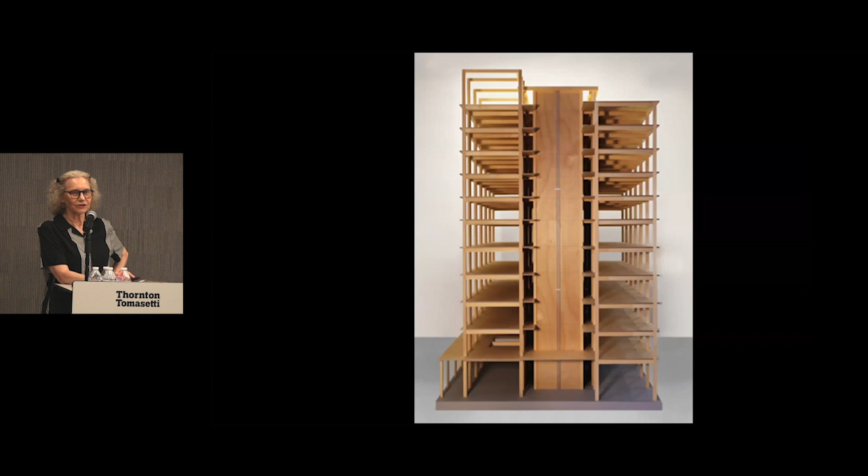The innovation that was encouraged by the $1.5 million grant by the Softwood Lumber Board for this particular tall wood building prize was to underwrite the testing of the projects that received awards, not to build those buildings. And so the role of government, or quasi-government agencies, in trying to jumpstart the mass timber industry is one of the issues we looked at. And these are views that were shown in those lectures, including the all-wood building, tall, nine stories, of Lever Architecture's Framework Project.

Let me talk a moment about Michael Green, because in his work with Eric Karsh as his engineer, they are people who from 2012 wrote a Creative Commons, or public domain, paper to do a state of the art of the knowledge of mass timber, and to advocate, as its title described, the case for tall wood buildings.

So height, even though it hasn't been achieved much over these last 10 or 12 years, and our title for tonight's talk is Height and Hybrids. So we are looking specifically at height and how do we go taller? How do we optimize the use in terms of vertical for tall buildings? But we'll also be looking at optimizing the material itself.

But that case for tall wood buildings, which Michael and Eric have pursued over these years, takes the idea of multi-stories as an aspect of urban density and climate crisis solutions by building urban density. And that's one of the things we'll also talk about tonight.

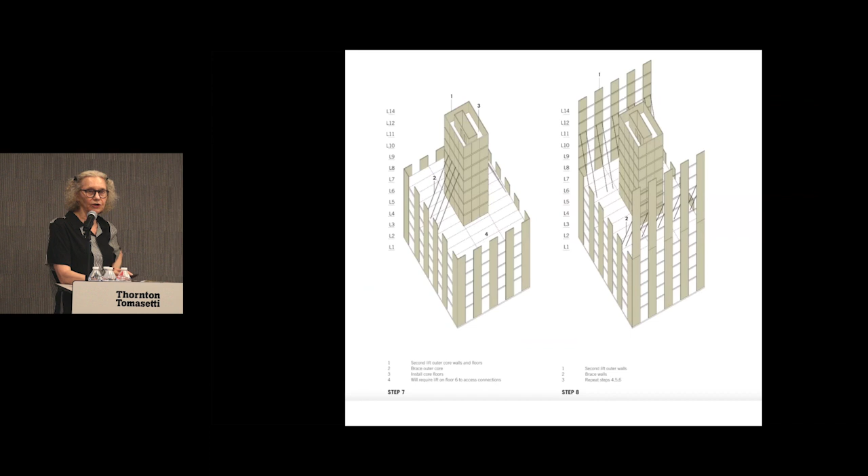So this project that Eric will mention, kind of the Empire State Building in wood, was a get-attention sort of effort, and it was covered by someone in this audience at the moment, and did indeed raise a lot of eyebrows. There were other projects that Eric will talk about that advocated for multi-stories.

Another one of our pair of speakers in the lecture series spoke specifically about the embodied energy as being what we call the now narrative, and the upfront carbon, the carbon cost of building that exists in the materials on the day that the building opens. And this is an enormously important issue, and one that our speakers all will be talking about tonight.

So Eleanor Gansky and David Lewis gave an absolutely spectacular lecture that I encourage you to watch on video, where they talked about life cycle analysis, managed forests, and many other issues, and alternative biogenic materials that are part of the kind of predicate that's necessary in order to be the foundations of talking about taking mass timber to scale as a mass-produced and industrialized product. That we'll be talking about tonight. And so in the lecture, in the exhibition, you see issues about embodied energy.

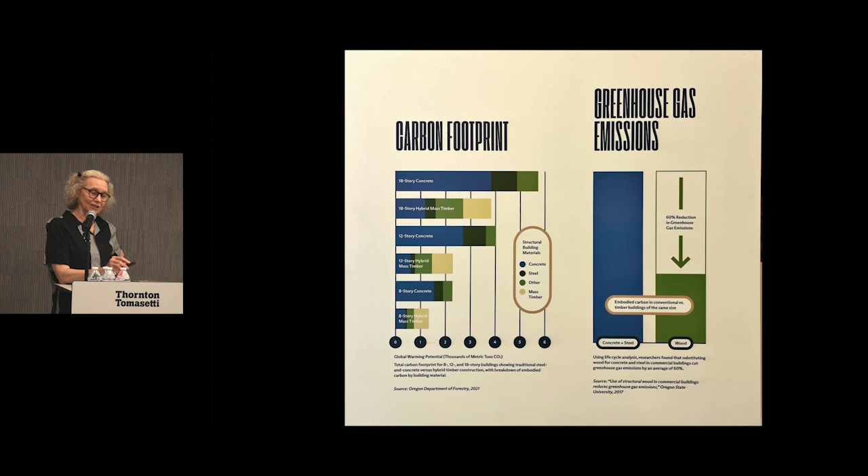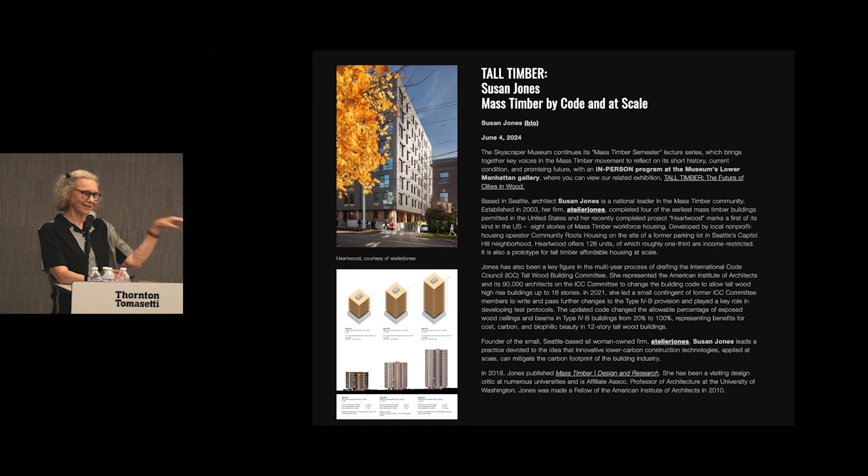We also had Andrew Waugh, who gave us a background in his earliest work from about 2008 or 9 in Europe, in the UK, a London-based multi-story building. And we also had Susan Jones, also from the West Coast in Seattle, who, again, in a wonderful lecture that I encourage you to listen to on our website, talked about her participation in code writing in the ICC code that raised, as you can see in the bottom slide, the approved height by code to 12 stories, and then the dream now is 18 stories, and we're going to be talking about height, especially.

Alejandro Fernandez from the Chicago office of Thornton Tomasetti will be our third speaker. And then in between, we have Benton Johnson from SOM, also from the Chicago office. And I acknowledge our carbon footprint for transportation for this evening is fairly egregious, but the important point is that we're all gathered here together to spread the message and to understand and to meet each other and kind of reinforce the bonds of community of the mass timber movement.

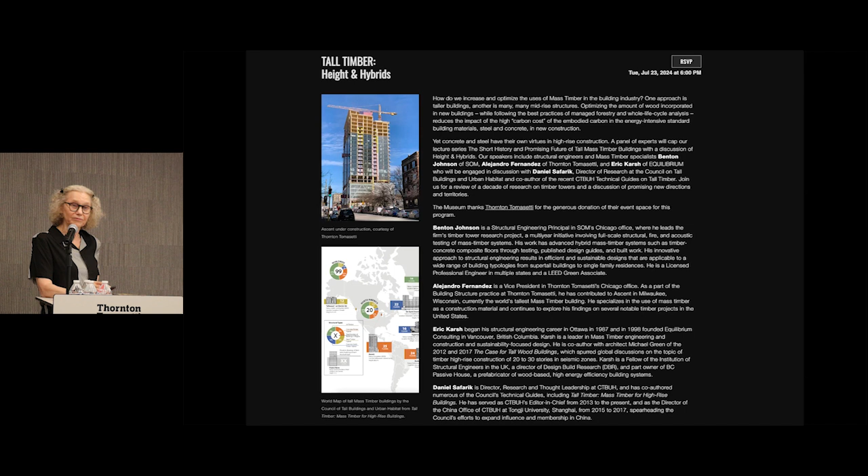So I'm going to hand this over to Eric. I think, with the longer introduction that we do, I forgot to mention Daniel Safarik, who is here also from Chicago, from the Council on Tall Buildings and Urban Habitat, where Daniel has been the editor on a series of publications like this one right here. The first of their two technical manuals called Tall Timber: Mass Timber for High-Rise Buildings.

And Daniel has been very involved throughout these past about 5 years in the CTBUH's initiative to run conferences and publish papers, and then these technical manuals. They were behind the exhibition that was actually started in Chicago at the Chicago Architecture Center called Reframed, which was the foundation for the exhibition which is now at the Skyscraper Museum. So Daniel is going to do a presentation that summarizes kind of what has happened since about 2020, when the CTBUH began to pay special attention to mass timber, and then moderate the Q&A that we have after.

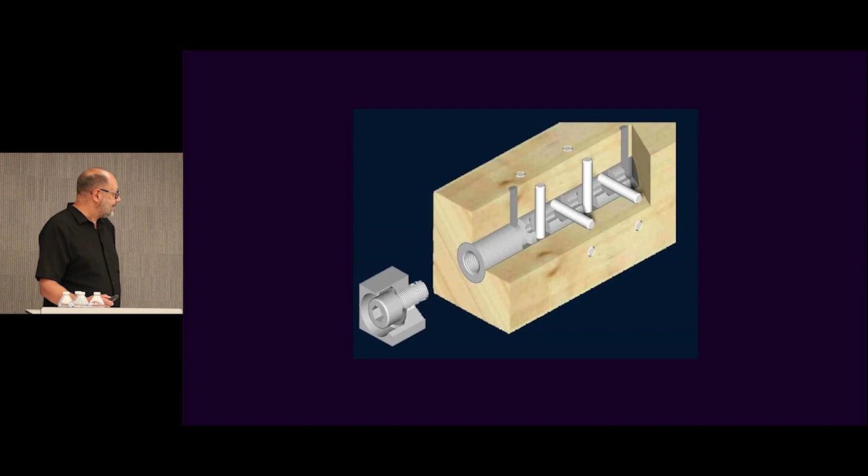The accuracy that these machines brought to the timber fabrication process allowed us to rethink the way we design wood. It allowed us to develop all kinds of really high performance connection systems that required accuracy without the labor intensive requirements that come with doing it by hand. And for us anyway, it completely changed the way we looked at timber design.

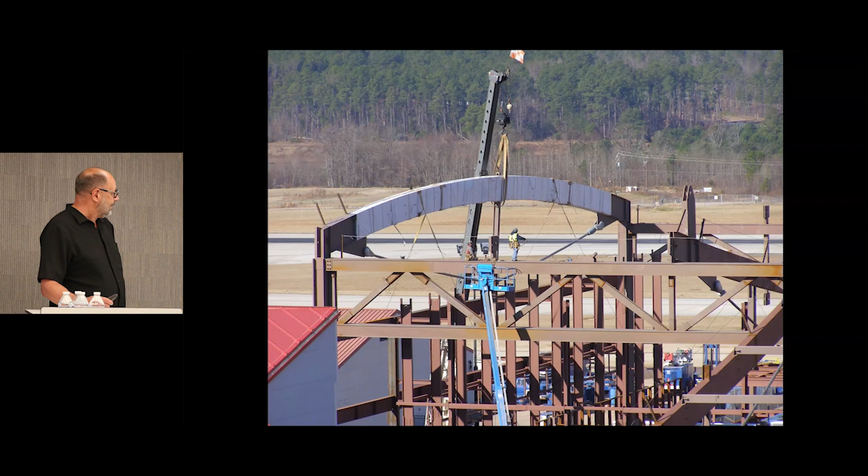And a good example of that is the first US project actually that we did. We were hired as specialty engineers to re-engineer the roof of the Raleigh-Durham Airport, which we did with a German connection system. That redesign allowed us to save about $1.5 million on a $7 million contract and bring the project on budget.

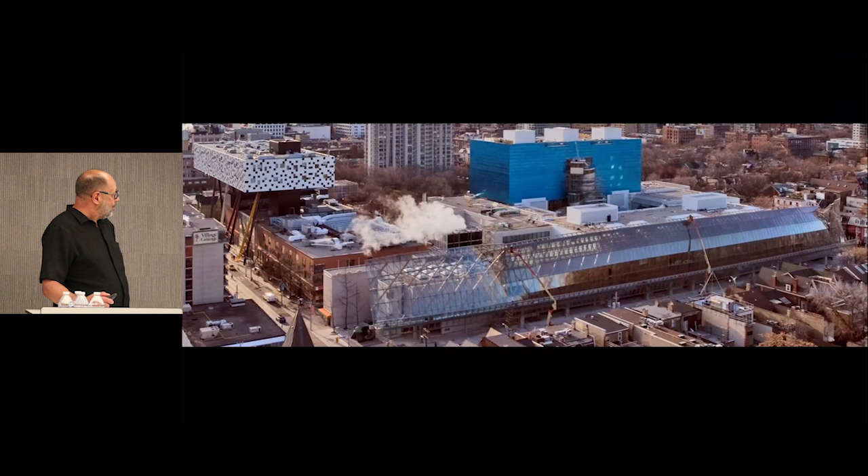You see here a view of the Galleria Italia from the interior. And I love showing this picture because this is a museum of art, and yet people are sitting down to look at the structure, which is very gratifying for a structure.

But the big change that probably impacted the discussion that we're having today was the advent of mass timber. So the idea that we could manufacture very large wood panels, and when we talk about mass timber, we're not just talking about CLT, we're talking about any engineered wood product that is made in panel form. And the idea of mass timber is the construction system, putting buildings together using large panel products.

All that technology kind of gelled and came together in one pivotal project for us, the Earth Sciences at the University of British Columbia in Vancouver, which was a demonstration project funded by the BC government. We could not get CLT in the province yet. So we decided to build the floors out of LSL panels, but because they're limited to 3.5 inches in depth, we had to make them concrete composite. So this is one of the test panels at UBC with 4 inches of concrete and acoustic separation and a 3.5 inch LSL panel, which allowed us to leave the structure exposed.

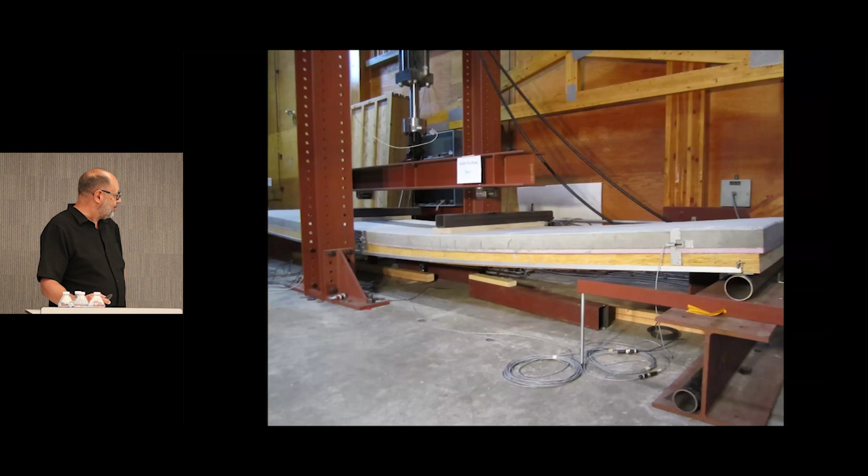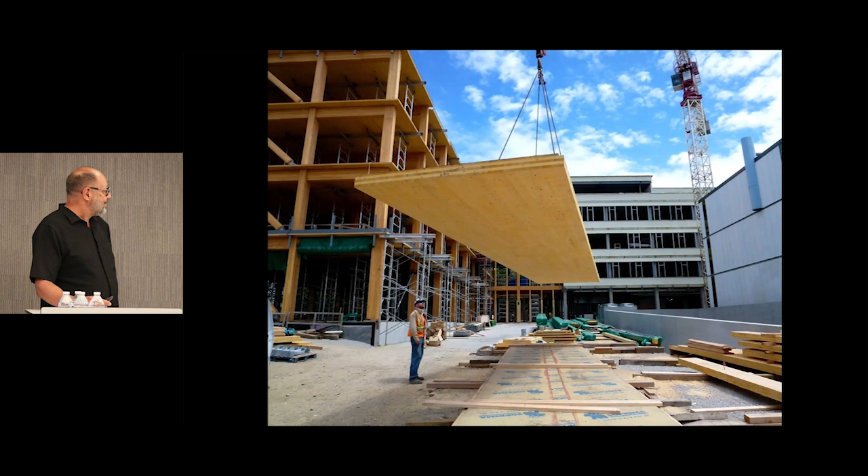But by the time we got to the roof, Structurelam started producing its first CLT panels, and we were really crossing our fingers that that would happen. So we were able to build a roof and the canopy that wraps around most of the buildings in CLT.

I have to say, standing at the top of it, I thought nobody's going to want to use this thing. I found it a little bit scary and thought anybody who realizes that this is a wood stair isn't going to want to use it. That was not the case. It turns out the average building user doesn't question the engineer's work, which was good news.

So it is in that context that when Michael proposed that we get a small grant to write this case for tall wood, that we approached the challenge of building tall wood buildings, with all that technology and innovation, 15 years of innovation that we had gone through. And I told Michael, we can do this. But it started as a 12-story building. And if you watch Michael's talk, he mentioned that.

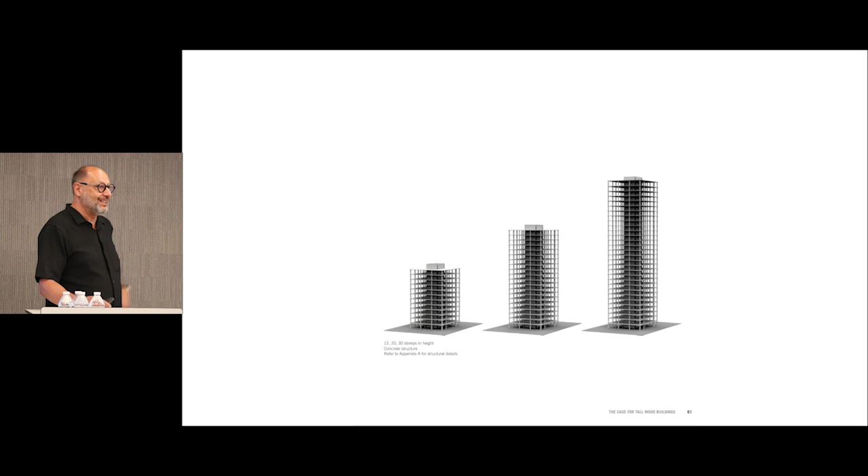I walked around Vancouver and counted balconies for months trying to wrap my head around the idea that we were going to do a 30-story building, a timber building at some point. But from the architect's perspective, it was a piece of cake.

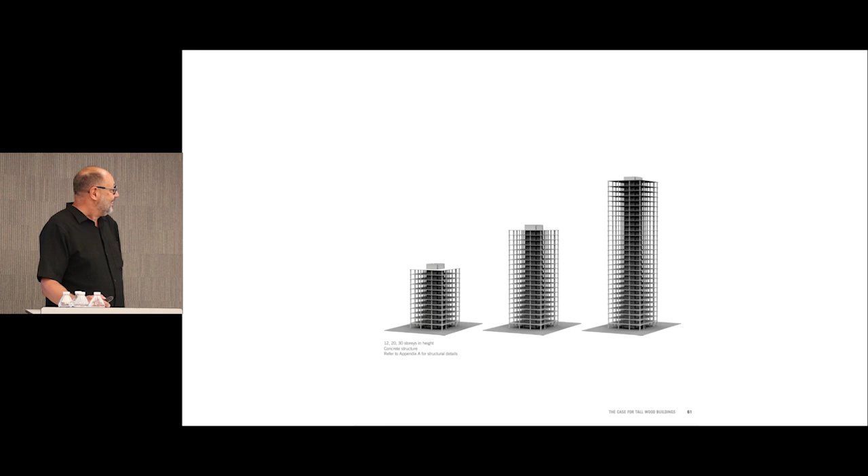In any case, we developed a system, and we were committed to not just doing the gravity system in wood. We wanted to do the lateral system mostly out of wood. So we developed this, what I would call a CLT shear wall and steel link beams, ductile link beam system, because we're in a high seismic zone, for up to 12 stories. And then we developed an exoskeleton equivalent for the higher buildings. And it worked really well.

The system has never been used in a real building, as far as I know, but it was tested at UBC and peer reviewed and could be used. But this was the engineer's solution behind the idea of doing a 30-story timber building at the time.

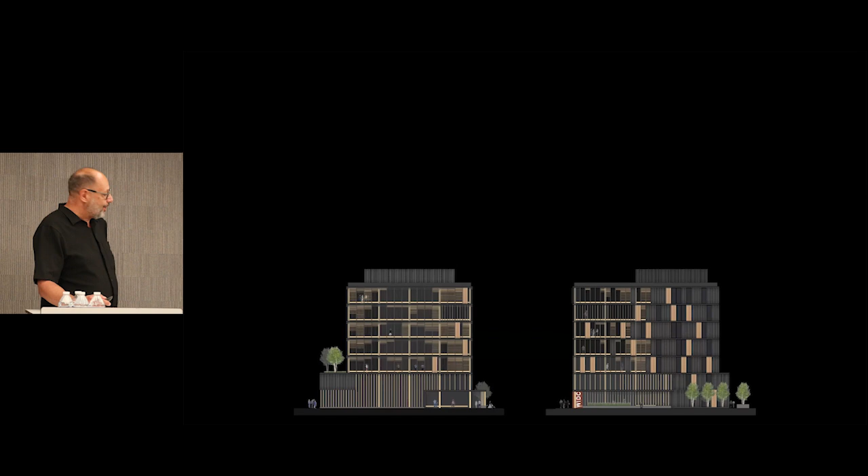This inspired the province of British Columbia to fund a demonstration project called the Wood Innovation Design Center, located in a small town in northern BC called Prince George. Not a very tall building, but it was the tallest modern all-wood building at the time in 2012, at about 100 feet. And this is a 3D image that MGA developed to explain the integration of services.

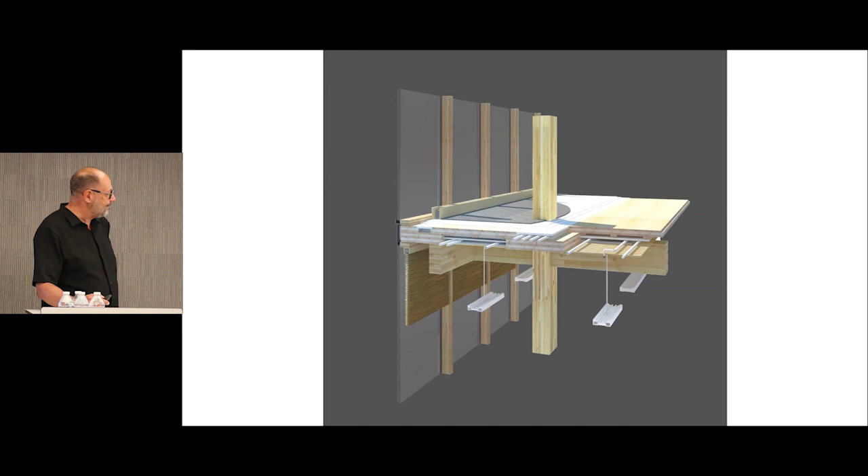Because it was a demonstration building, we wanted to show as much of the structure as possible. So we were looking for clever ways to hide services in a corrugated CLT floor plate, which you see here. And this timber can be built through the winter. And this was the first project in North America to have an all CLT core. Not the highest seismic zone in BC, but still a seismically active zone. And we managed to do the entire building, including the lateral system, out of CLT.

There's a view of the lobby, and you see here the underside of this corrugated floor with accessible panels to access services, and then the exterior of the building, which you also saw in Michael's presentation.

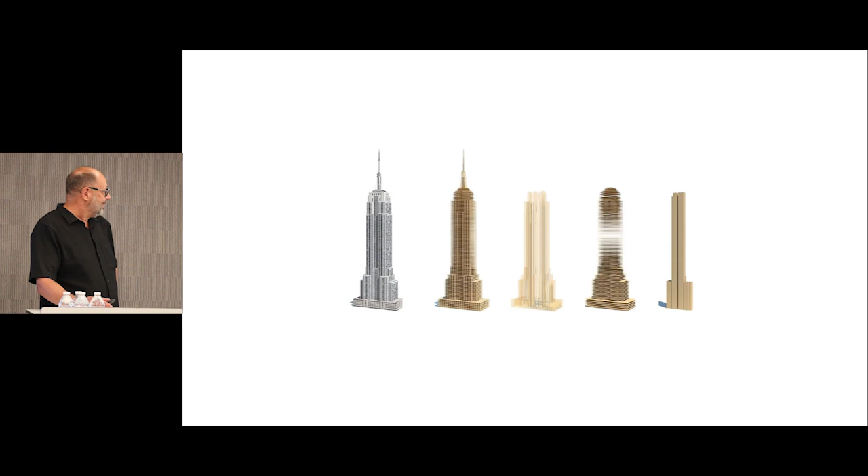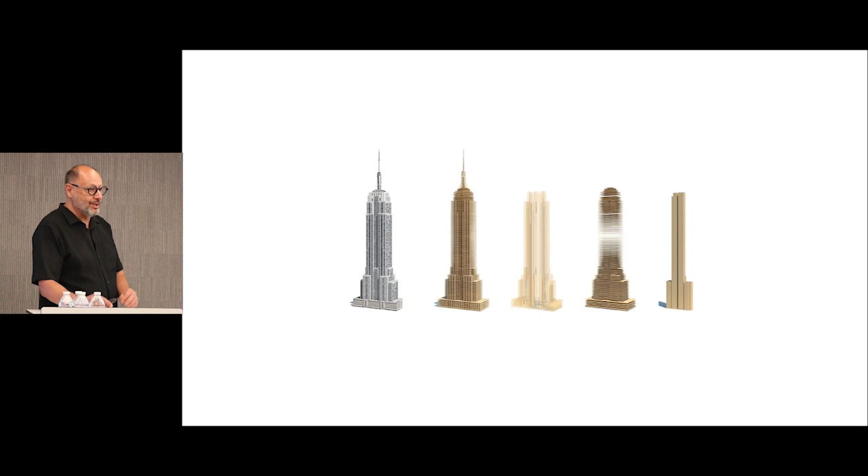But then this brought us to a marketing exercise for a company in Finland called Metsä Wood. They make Kerto Q LVL. They wanted us to redesign the Empire State Building out of wood, or find a way to show that it was possible. So we came up with the idea of using shear walls on either side of the 72 elevator banks. So that gave us a 220-foot long shear wall at the base. And then in the opposite direction, we basically went the way that the real building is built, using moment frames.

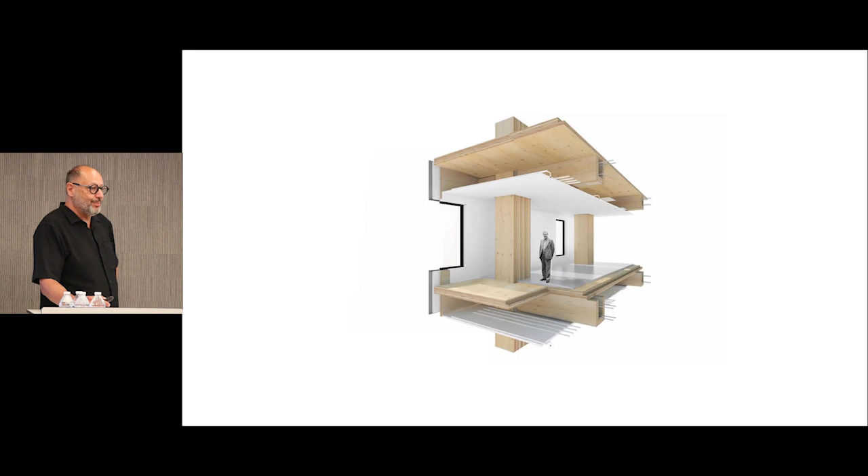And moment frames in timber are difficult to do. And there's always the issue of creep and shrinkage in wood. So we had the idea of using a system that was first used in New Zealand, using post-tensioning cables inside of hollow caissons. And we would have had in real life to figure out clever ways to deal with that shrinkage at the column lines, but we did a very simple model and concluded that it was absolutely possible with 5-foot by 6-foot LVL columns at the base. So here's our marketing image, which you've seen probably a few times by now.

Another tall wood project with Shigeru Ban in Vancouver. This is called Terrace House. It is right next to the Evergreen building by Arthur Erickson. And Shigeru Ban's idea was to have a concrete structure that matched the concrete structure that is adjacent to it, and then do the rest in timber. Unfortunately, the developer ran out of money, sold the project, and my understanding is that this project right now is going to be built entirely out of concrete. But it got through permitting, and the city of Vancouver approved an 8-story on top of 11-story concrete building.

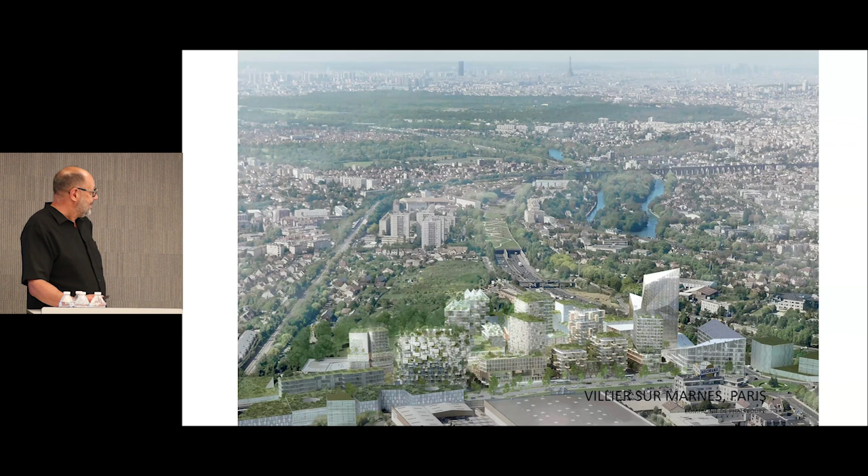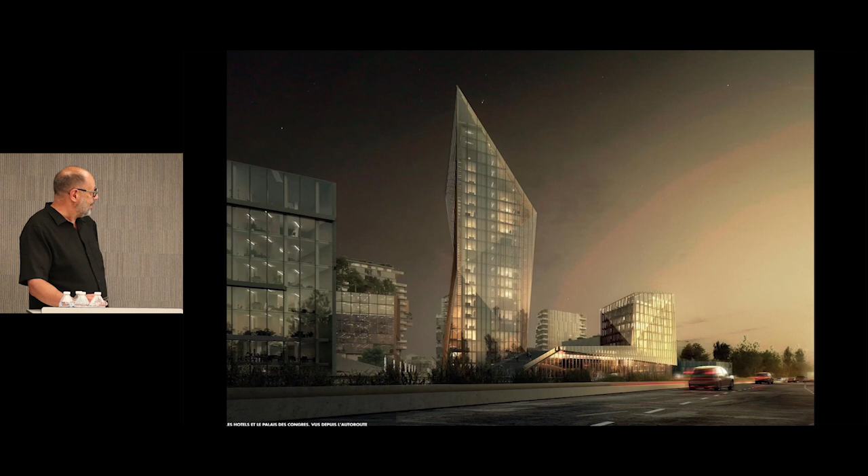We were invited in 2018 for a competition in Paris. This is the project. It's 1.5 million square feet. We won the competition. There are 6 architects on the project, including Michael Green, who's got the two tallest towers in the middle, and one on the right-hand side by Kengo Kuma, who we helped with engineering. The project has yet to go ahead, but like I said, we won the competition, so we're hoping to go ahead with this project at some point. This is a 26-story tower, which is going to be a concrete core and timber gravity system.

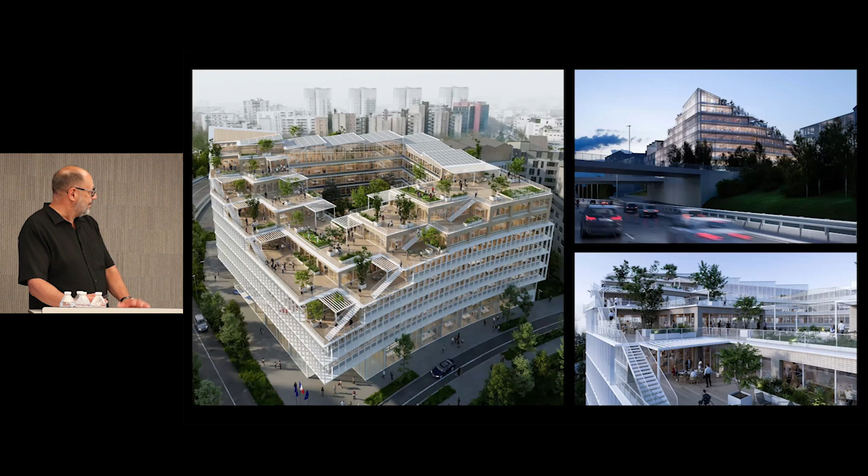So this competition brought us to bid on other projects in France. This one we won the year after and actually got to build it. It's a school board office building. It's 9 stories in total, including about 1.5 stories of concrete. And what is interesting about this is that it is a glulam post and beam, but for cost reasons, we use a very, very thin precast plank for the deck. It's 50 millimeters thick, so 2 inches. And we have a concrete topping for acoustics on top of that. And that project was just topped out about 3 months ago.

We kept doing projects in France, so we now have an office of 4 full-time engineers in our Paris office, and are doing other projects. This one is a 350,000 square foot office building, which is currently in construction. This one is in Madison, Wisconsin.

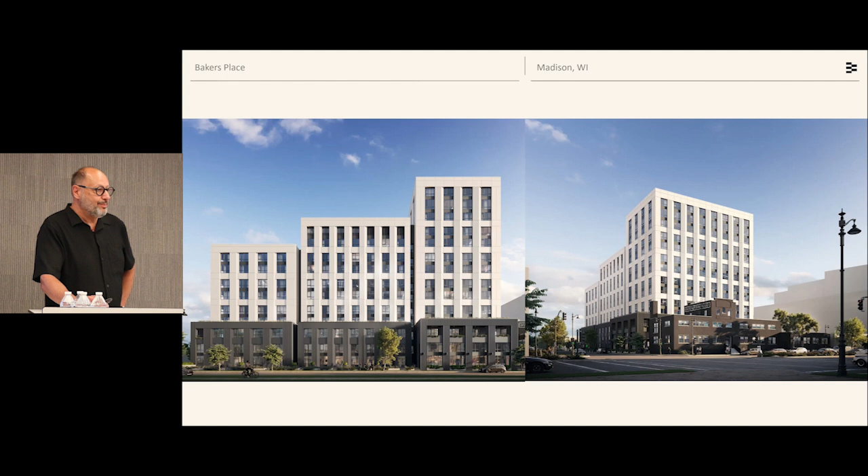It's the first neutral project tower, which is 3 + 11, so 11 stories of timber. And that one also just got completed, the structure. In this one, we have a hybrid steel post and beam, which are all integrated into the partitions. It's multi-residential. And the idea was that we were going to hide all the column and beam elements in the partitions. But the CLT we were hoping was going to be partially exposed. I'm not sure the developer is going to win that battle.

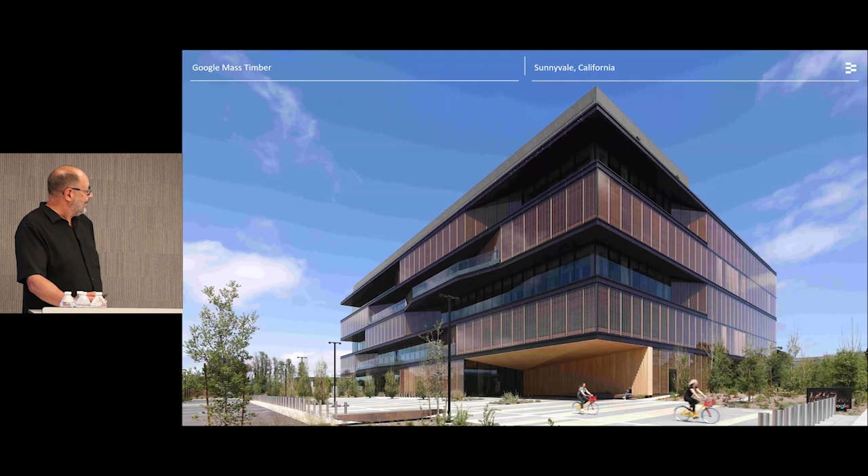And I need to wrap up. This is Google, which we've just recently been allowed to show, the first Google office building. 185,000 square feet, 5-story. It's not a tall building, but representative of the potential for mass timber in the market.

Like, Carol is waving at me.

The lateral system is BRBs, which is completely independent of the gravity system, which allowed us to leave it exposed, avoiding intumescent paint. We focused on wood-to-wood connections, trying to avoid steel in the connections.

So just to wrap up, I didn't talk about the environmental impact of our buildings, but I do think, as Andrew pointed out, that there's a significant opportunity in doing horizontal or vertical expansions and reusing existing structures, either for the expansion itself or for recladding. I think mass timber envelopes are a good way to incorporate significant amounts of wood in our buildings moving forward. So I apologize if I went a little over my time.

I'll introduce Benton Johnson, who's a structural engineer and a principal at SOM's Chicago office, where he leads the firm's Timber Tower Research Project, a multi-year initiative involving full-scale structural, fire, and acoustics testing of mass timber systems. His work has advanced hybrid mass timber systems, such as the timber concrete composite floors through testing, and he's going to show you this, so I won't say that anymore.

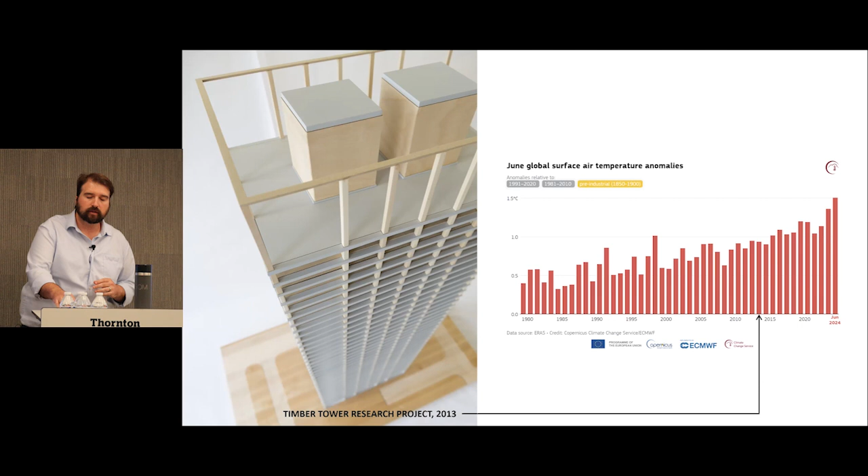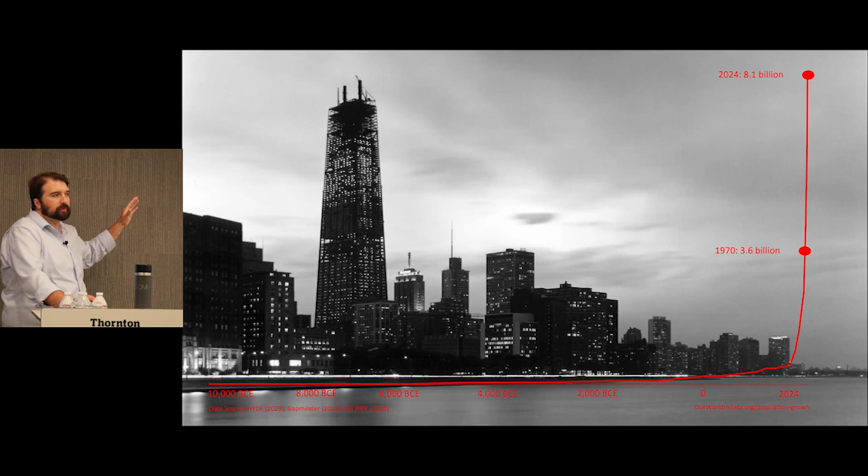And so with the Timber Tower project, really it was trying to think about what is the best and fastest way that we can make a difference in this issue. And this is one of these amazing graphs that was a real eye-opener the first time I saw it. So this is a graph of human population, starting over here at 10,000 BCE, going all the way over, and you can see where zero's at, and then right as the Industrial Revolution happens, it's hitting a ramp and it's going straight up, right? And so thinking about what that impact has been, and really the climate change as a result of it.

And so thinking about where is that construction going to happen in the future? So this photograph was taken when the John Hancock Center was under construction back in 1970, when we had about 3.6 billion people. Since then, now in 2024, we've just cracked 8. We're at 8.1 billion people.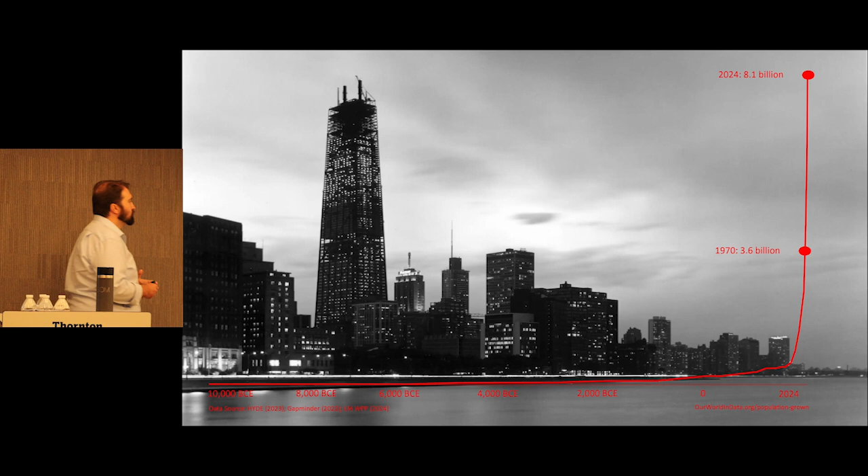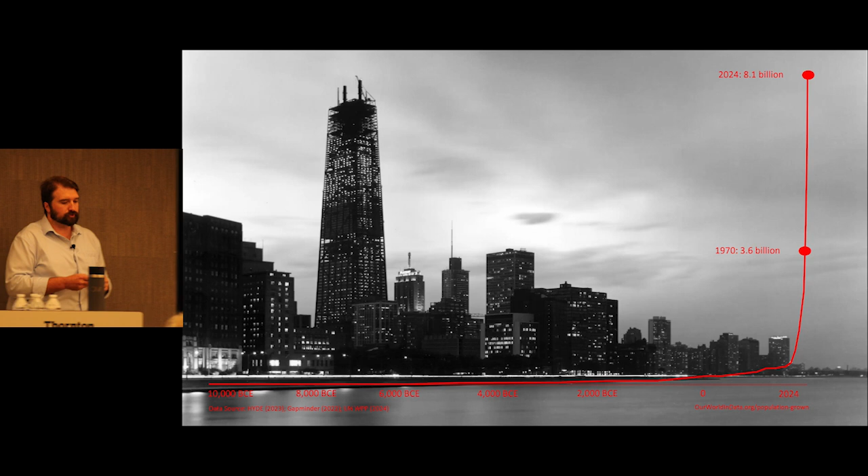So the question is, how are we going to manage climate change, and how are you going to do it? You're going to do it by meeting people in the cities where the population growth is happening. The challenge with that, of course, is the taller that we build, the more materials it takes to build, and the more embodied carbon it takes as well.

You want to bring timber into the city because that's where the population is growing and that's where the buildings are being built, but they're also more intense. And so as we looked at different solutions to meet that criteria, we reimagined the DeWitt Chestnut as a modern timber building. And so to do that, we really thought there were a couple of things that we wanted to be able to achieve. Number one was longevity.

Building a building that is going to be obsolete and not occupied is a bad investment because you lock in all that embodied carbon into a building that's half empty. So doing long spans, clear spans to be able to get all the gravity load onto the lateral load resisting system, but also to improve the longevity of the building was key. And we studied this as an all timber building and what our solutions were as a concrete building.

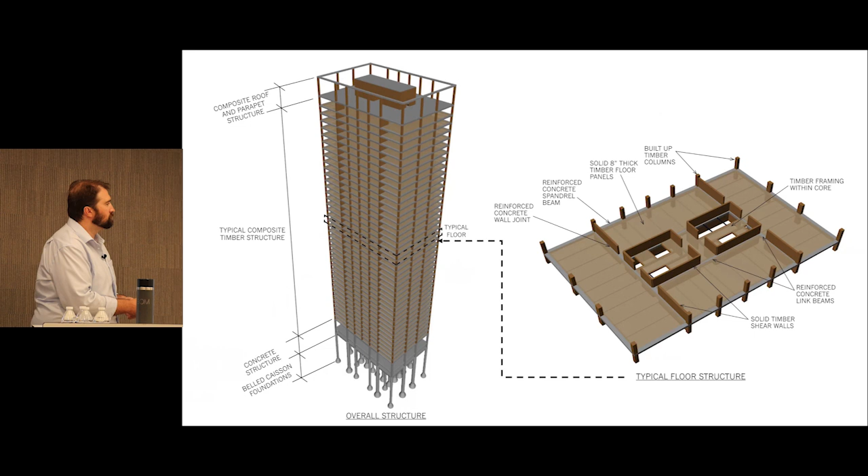But what we find is that the hybrid solution was actually most efficient to be able to support that building. And so from that, what we took away was that if you're going to try to make the biggest possible difference, you want to use systems that can be competitive and buildings that are going to have longevity to them. But we also recognize that about 65 or 75% of all the material and embodied carbon was in the floor plate. So we started asking ourselves, if we look at a spectrum of buildings, what is really going to move the needle?

So on the left-hand side, you have an all-concrete building. On the right-hand side, you have an all-timber building. And in between, you have all these different options, like option 2, which is a concrete frame with leave-in-place timber formwork. Option 3, which is a composite timber frame and a concrete core, still mostly timber. And then option 4 is a composite timber floor with a timber core.

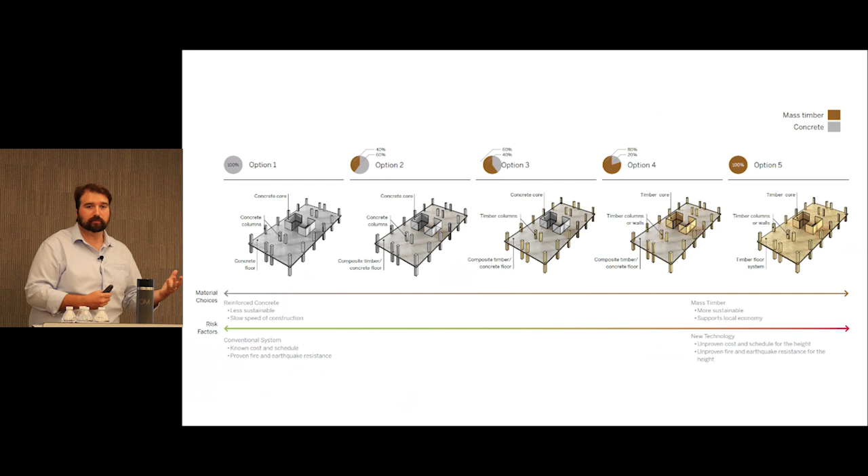And so our big takeaway from this is, no matter what you're trying to do, I'm trying to sell you a timber floor. You want a timber building? Let's put a timber floor in there. You want to do a steel building? Let's put a timber floor in there. You want to do a concrete building? Let's put a timber floor in there. Because that's where you get the biggest bang for your buck, and that's how you can get speed to market as quickly as possible.

And then as part of this, keeping things open sourced, because if you're interested in the sustainability of it, you need to make it available. So we published a report on this, blending the US methods and the European methods for timber concrete composite, really as a tech note to start the conversation in the US about using these systems.

And all the while we're doing this, we're also, of course, often designing buildings. So this is the United Nations in Geneva, and we're doing the expansion of their office. You can see it in the foreground there with the green roofs. It included the renovation of the existing building and then the expansion.

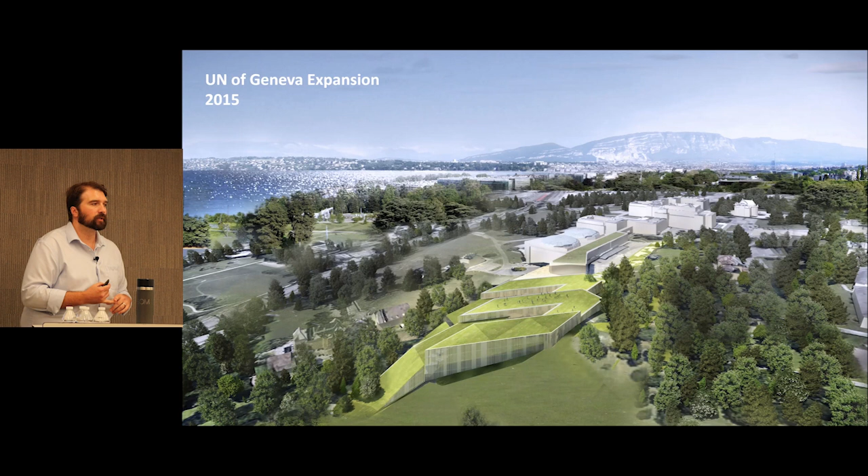So the United Nations, their goals are going to be as sustainable as possible, lower the embodied carbon footprint, lower the operational carbon footprint, and that was our mission headed out. So it's an office building that tries to make peace with the surrounds. It finds itself into the hills. It cascades up. It doesn't try to peek out above the trees because sight lines are important there and enjoying the nature. But it's also human scale. It's got a lot of individual spaces that you can go and reflect on.

And I love this photo because now you can see up into the building and you can see that timber concrete composite structure that was used. This is an interior photograph of the project. And what we actually found is that, to achieve those kind of clear spans, again, as the United Nations, they're going to be using this building for a long time. You want to be able to adjust those floor plates over time.

But what they also wanted to do was have very high energy performing systems, all passive systems, so radiant heating and radiant cooling, and to put that into the slabs. So we also used precast concrete slabs, 2 inches thick, with a bunch of coils in there that can do heating and cooling.

And this is a great example to say, if you want to get that high performing energy system, if we were to use timber and a concrete slab over it, that timber deck would actually insulate and prevent you from doing the passive cooling as that cooling wants to drop through the slab. And so using a timber building would actually be in direct conflict with that mission. So by achieving this timber concrete composite, we can get the long open spans and achieve all of the embodied carbon and sustainability goals that we're trying to look at.

Now that system could be stacked up to a tall building, but we want to look a little bit more towards North America here with the County Office Building 3 in San Mateo. This building is now complete and getting moved in. And so this project is located in Redwood City, and it's very, very high seismic. The San Andreas Fault is right there next to it. And there were real questions about efficiency, seismic resilience, and really making a statement about California's positions and the county's positions around sustainability.

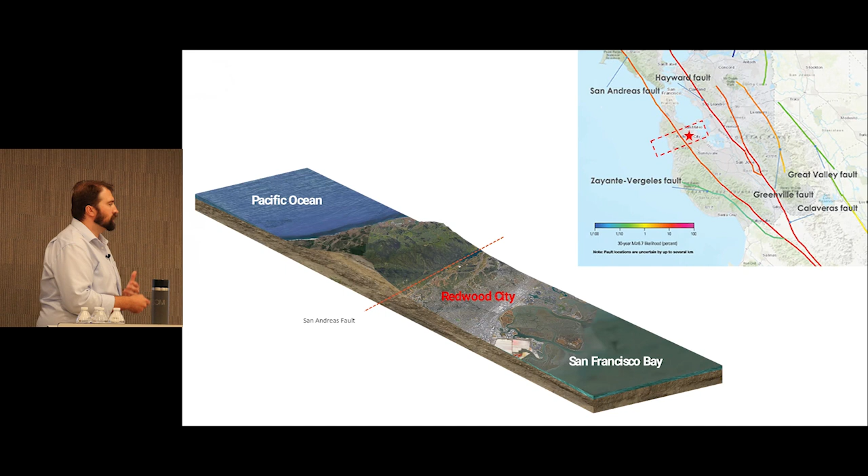And so contending with that high seismicity is something that you're always trying to deal with when you're looking at a timber structure. So breaking that building apart, the main components were 5 levels of office for the county employees up above, but then this main feature, which is the actual chambers in the lower level, we had to create a very long span to be able to house meetings there. And because of the high seismicity, we ended up using buckling restrained braces. It's an R value of 8, so you absolutely minimize the seismic forces.

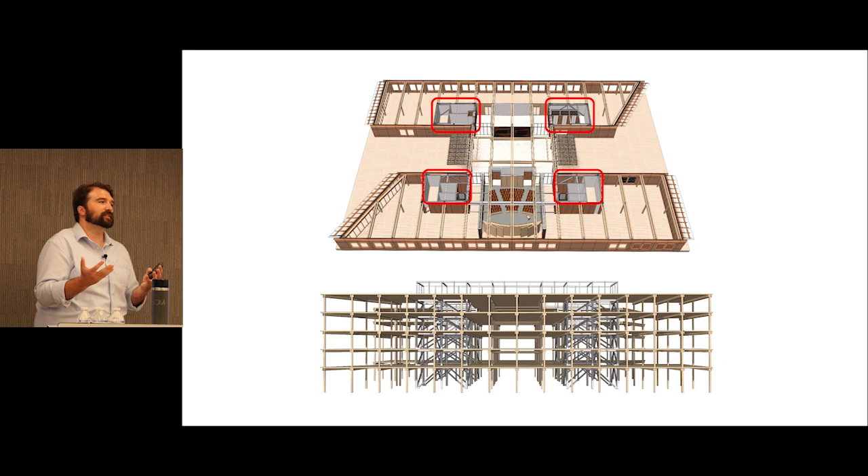One of the things that I found so interesting about trying to do these timber buildings is that if you have a lightweight timber system, you're in good shape because the seismic forces are low. But then if you use CLT shear walls, your R factor is equally as low. So your seismic forces end up being about the same as a steel building because you don't have that ductility. So for this project, we located 4 different cores with buckling restrained braces, the highest level of ductility that the code recognizes, so that we can make best use of that lightweight timber system.

And these are a couple of drawings of the floor section. And so for us, what we wanted to do was, again, create those long open spans. So we designed the building around shipping lengths. We said, if we're going to have a 65-foot maximum length, we're going to design these bars that are 65 feet long, place a single support in the middle, and have the beams run past the columns, so that they have a continuous span and can make a 32-foot lease span work, which is pretty reasonably large for a timber building.

And then the other issue is that when you run into that buckling restrained core, how do you actually make a diaphragm connection? How do you create that rigidity in there?

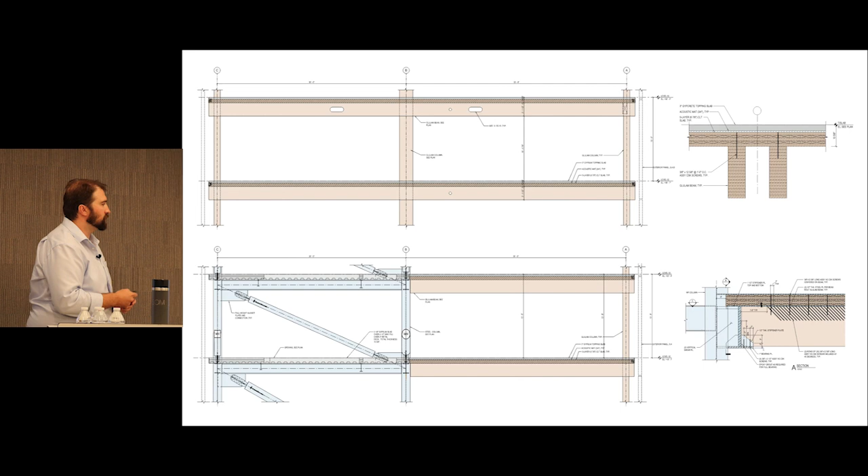And what we found is that to maintain the depth of the timber beam, by actually using a heavy steel connection into that steel core, you could maintain the depth while also creating a strong seismic connection. So there's this interplay of systems when you're looking at hybrid construction.

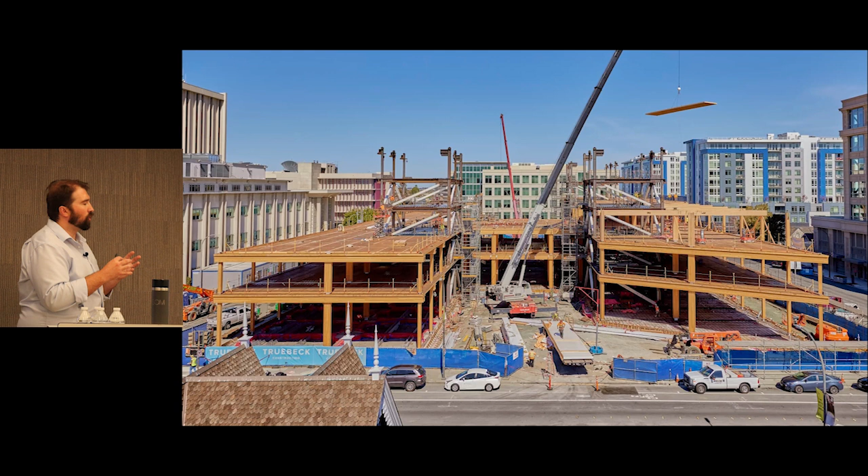And so this is the construction as it goes up. The nice thing about the steel cores is they can rise as fast as the timber. I mean, the timber was right behind them. So there was some argument about pick time and all those things. But this type of system that can stack up, there's really no limit to the height.

So when we're talking about 18 stories and taller buildings, it's really about getting the functional spaces correct and being able to detail for all of the necessary fire ratings. Once you achieve that, then when you start stacking it up, you're in good shape for what the code is kind of intending right now.

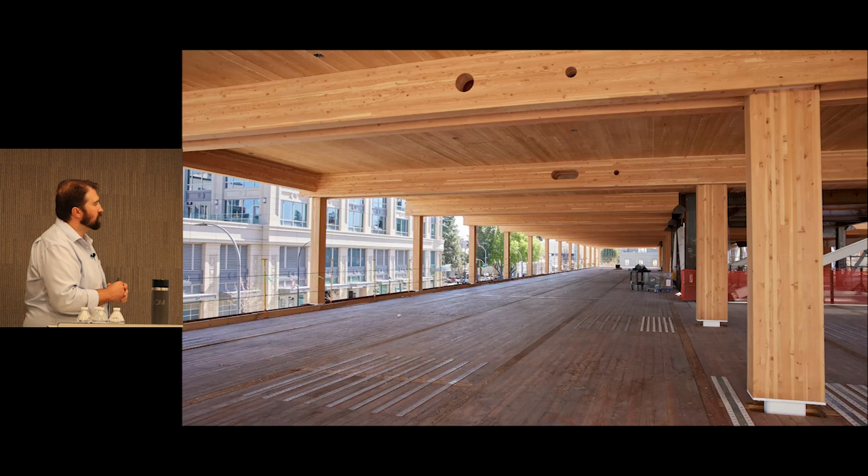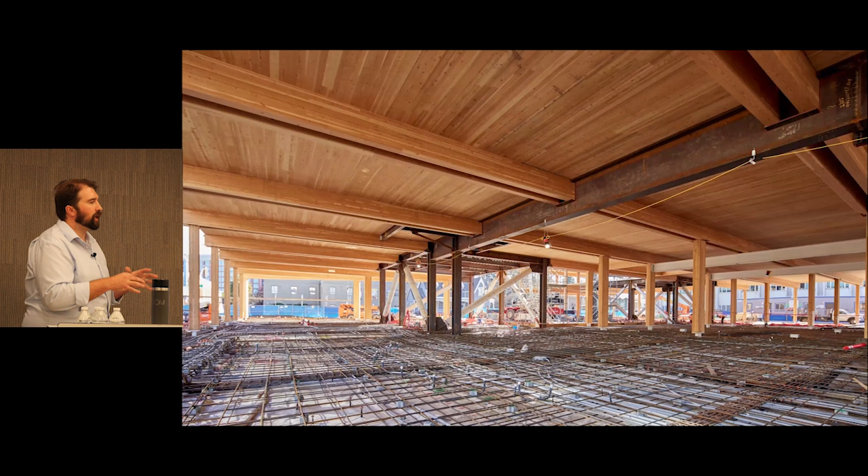And so this is the long span system there with the 32-foot clear lease depth, and you can see the timber beams that are connecting into those BRB cores. And so by doing that, we were able to minimize the foundation demands and to really minimize all of the costs associated with that. I like this photo here because it's the long transfer beam that was necessary over the chambers to allow for those big meetings.

And so the nice thing about hybrid construction and height is you kind of have this extra tool in your tool pouch, right? If you need a big transfer beam, you've got a steel guy on site. If you need a big transfer A-frame, you've got a concrete guy on site that can allow you to do those things. It gives you an extra gear, an extra out as you go through.

So there's the building topped out and going forward. So this is a very hybrid building, but you could continue to stack that up until code limits. You might want to make some adjustments about floor plates and things like that. But all the systems, all the kit of parts is right there, and it gets you over the finish line sooner.

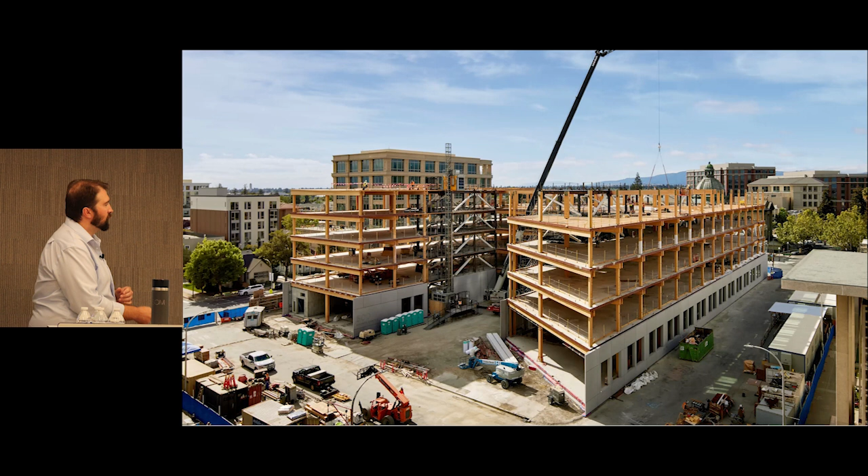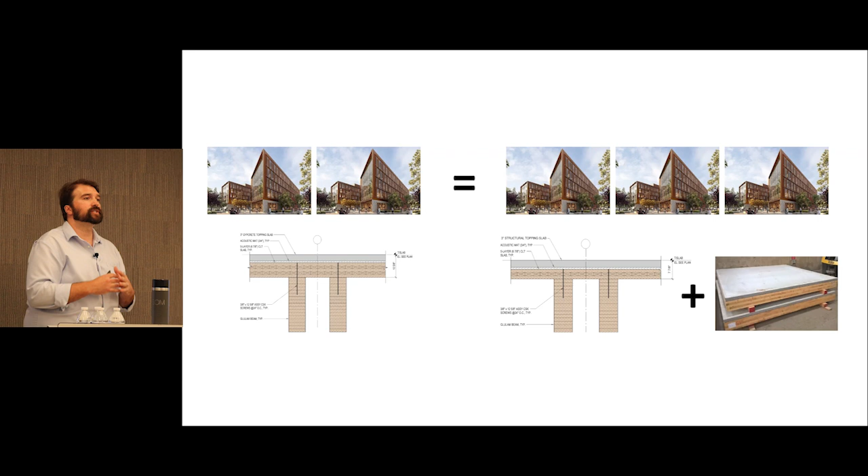But if you were to make that concrete topping slab composite, we could actually reduce that CLT from 5-ply down to 3-ply CLTs, meaning for the amount of timber in 2 buildings, you could actually build 3. And when we're living in a world where we have a finite amount of timber that can be extracted from the forest, this allows us to stretch our buck further. It allows us to get more timber buildings out there, offset more carbon intensive concrete construction to achieve that ultimate goal, which is to reduce the carbon footprint.

And so we've continued on. These are some recent testing photos where we're looking at some TCC behavior and some fancy connectors in there that we're trying to develop and bring to market. And so we're believers in it. We've been at it for a long time, and it all starts and finishes with these floor systems.

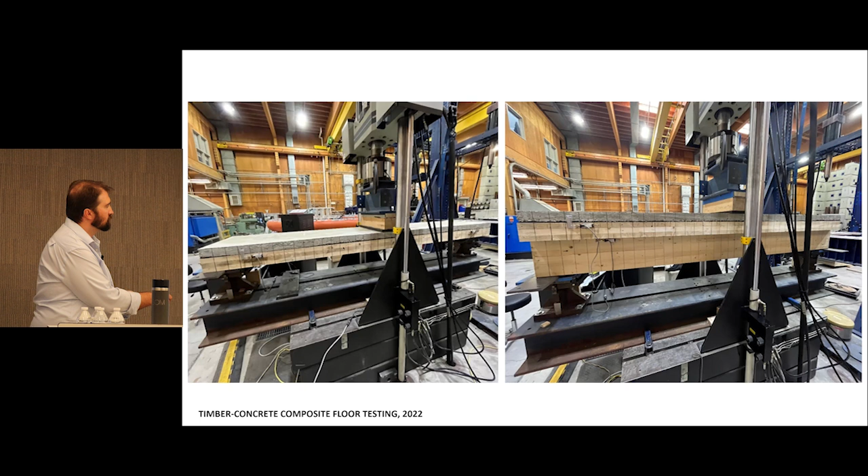Alejandro Fernandez is our next up. He's vice president at Thornton Tomasetti, Chicago's office, as part of the building structure practice at TT. And he was involved in the structural design of Ascent in Milwaukee, which is currently the world's tallest mass timber building. So he's going to represent height as well as TT. And Alejandro, take it over.

Wonderful. Thank you so much. Thank you, Carol. Thank you, Eric and Benton, for these presentations. It's super interesting to see all these timber projects brought in together. And isn't that on? No. Oh, sorry. I see what you mean.

Thank you. So what I want to show you now is a little story of 3 buildings that describe a trajectory that we have had at Thornton Tomasetti when we went from research to building the building that Carol is talking about, which is currently the tallest mass timber building in the world, and then a newer building that we're doing that is going to beat the record of Ascent.

So the first project is River Beech, and it's actually a project that has shown up already in another of the presentations earlier in this program. This was a project that University of Cambridge promoted. And University of Cambridge, they had a budget for investigation. They were trying to do research on mass timber buildings, and they approached a number of companies to try to push the limits of mass timber construction, and by doing that, identified the areas where research was needed.

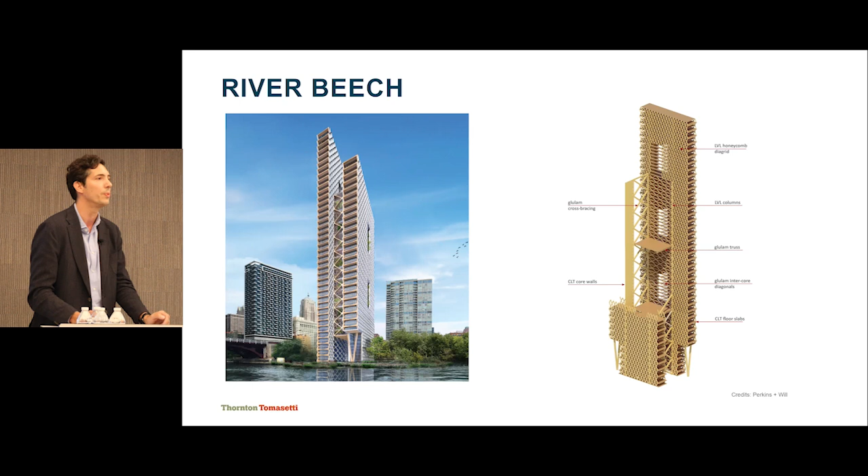Now, a lot of it had to do with connections. That's one of the parts that we realized was a key item for these buildings, and there was a lot of research. Carl showed earlier a few of these connections, so how we're trying to join these pieces.

It also unveiled one of the potentials of mass timber, which is prefabrication. And together with prefabrication, there is the potential for modularity. How can we maybe start building our cities outside of the city and just bring these mass timber volumes that are stacked very quickly in the city and allow us to build faster and in areas that maybe are not so easy to build.

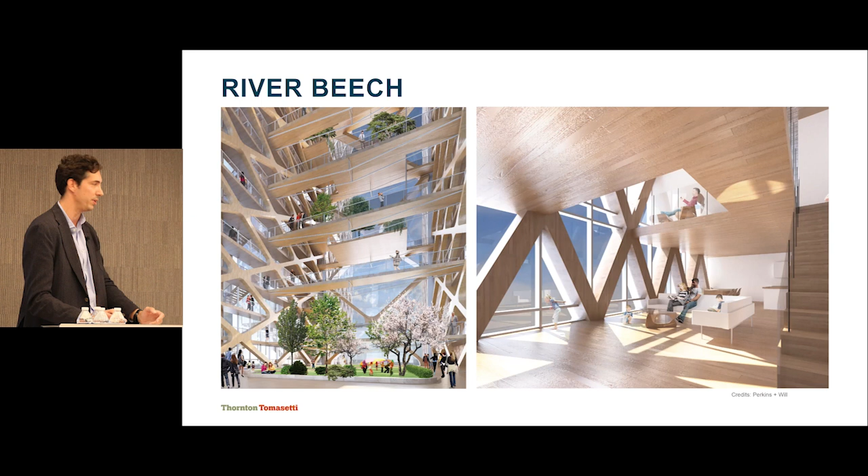But the most important thing of River Beech to me is it created these renders. It started unveiling to the world the possibilities of mass timber buildings. This got published, everyone got very excited, and there were publications all around the world about this building. And you start to see the warmth of a mass timber building, this connection with nature, how it creates a completely unique experience.

And out of these renders, one day in the office, we got a call from a developer in Milwaukee. This developer had a plot of land in Milwaukee for a number of years. This was the third attempt at the property. They had actually been able to zone a building that was 35 stories tall, but the numbers didn't work. Milwaukee is a concrete market, it's super cheap, and they kept trying with concrete. The numbers didn't make sense.

And suddenly they saw those renders of River Beech, and they saw an opportunity to create a market differentiator. And with a little bit smaller building than they were trying to do in concrete, suddenly the numbers started making sense. Now they can charge Chicago rents in an area that is further out, like Milwaukee, and they can start making the numbers work.

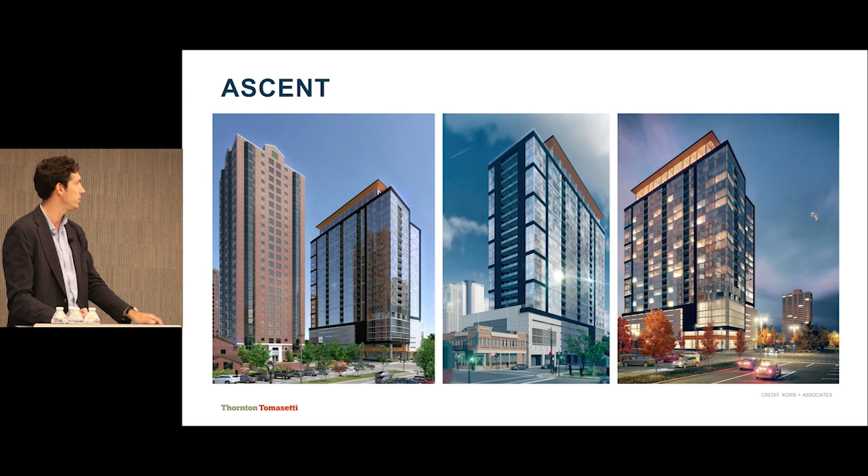So Ascent is a 25-story building. It's currently the tallest mass timber building in the world. It has a 7-story podium and 18 stories of timber above. And here, hopefully, we can show a little construction sequence. So this is the building where you can see there's a concrete podium. The bottom is parking, and on top we have residential units.

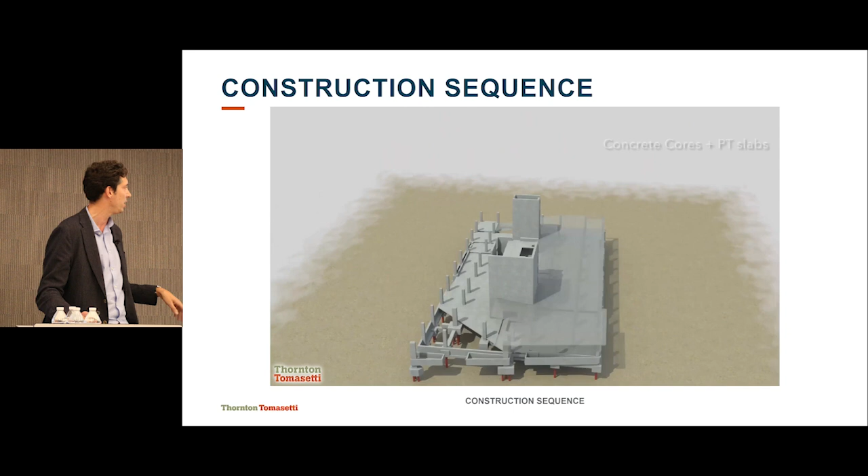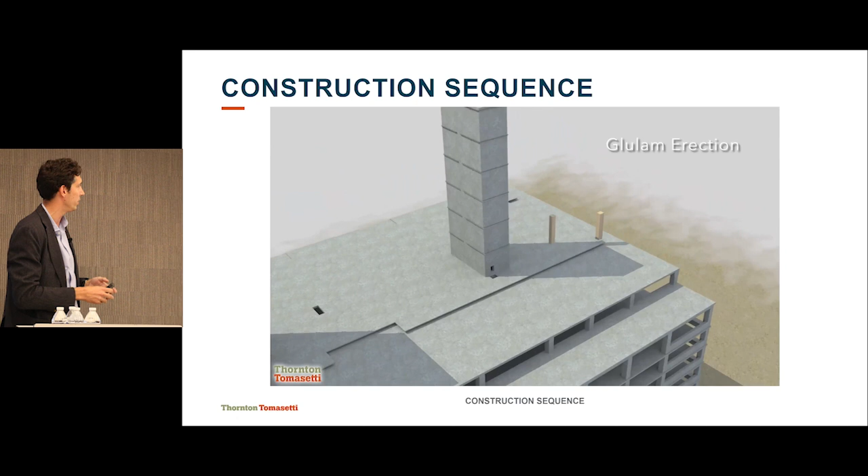So as in any building, everything starts with the foundations. It's Milwaukee, so they go very deep, and then you start with the traditional construction. Now you can see that at the top of the podium, there is a transfer system because the grid of timber is a little bit denser than the grid of concrete. And then the building has glulam columns, glulam beams, and on top of this structure, we have CLT panels.

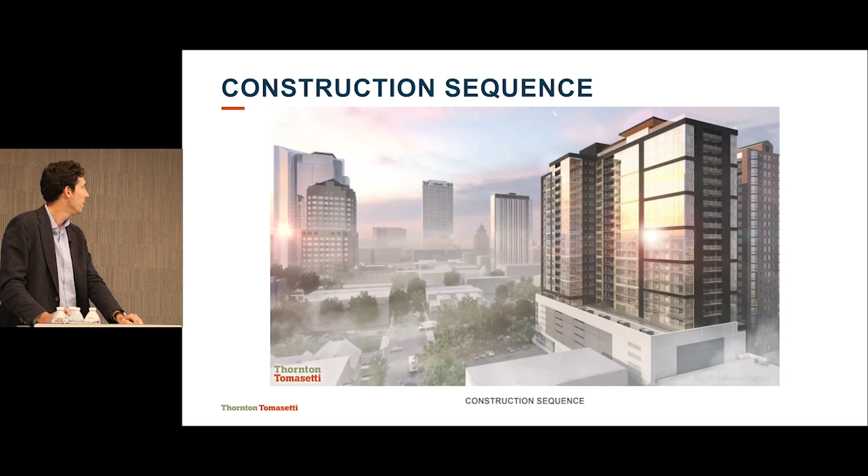And this building ended up having 19 stories of mass timber construction on top of the podium, and it was built at 1 story per week. Now, in order to do this building, one of the things that we had to do is we were doing a new construction system at the time.

Nowadays we have a lot of mass timber buildings, and each day it's becoming more and more common, but especially for these heights, all the partners involved in the project had to adapt. We had to make sure our mechanical engineers adapted to timber, a material that is going to move much more than a traditional concrete building. This building moved vertically in construction like a 60-story concrete building. All those movements had to be integrated in the structure, and there was uniqueness with all of this.

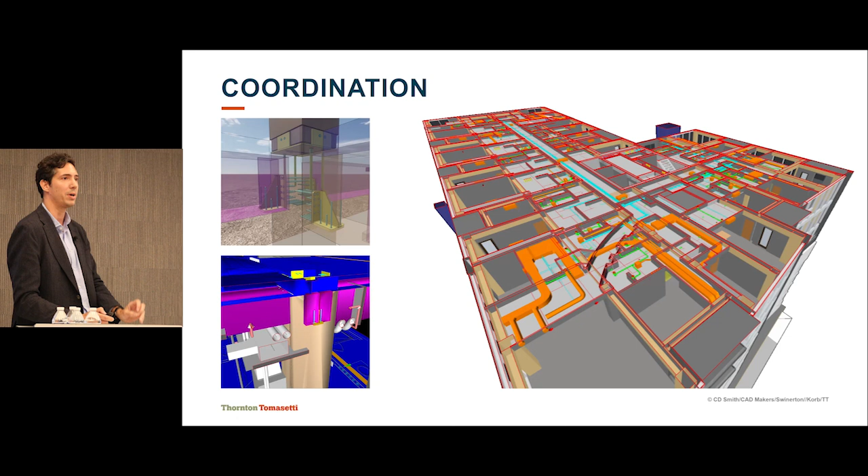There was also a lot of detailing that had to happen to truly maximize the potential for prefabrication and optimize the construction process. The good news is the project moved forward, even though it was right at the beginning of COVID. We were bringing all the timber from Europe, and the Suez Canal was blocked for the whole world. But everything came on time, and in a matter of months all the timber was erected.

You can see here a picture of the construction. It's glulam columns, glulam beams, CLT. It's a very clean construction. Everything comes prefabricated, so there is very little work. There is only a crew of 12 people to build these 20,000 square feet per floor.

And they create these amazing spaces, right? You start exposing the timber. This developer wanted to expose timber, so it was not only about building in timber, but being able to expose it. We got very lucky because the city of Milwaukee was very receptive to approving the building through a variance process, and we ended up exposing about 50% of the timber in the building.

Two weeks ago, we submitted the foundation permit for the next iteration of this building. That building was done with New Land Enterprises as the developer and Korb + Associates as the architect. The new iteration is with the same construction company, C.D. Smith, but a different developer. It's Neutral, actually the same developer Eric was showing for Breakers Place.

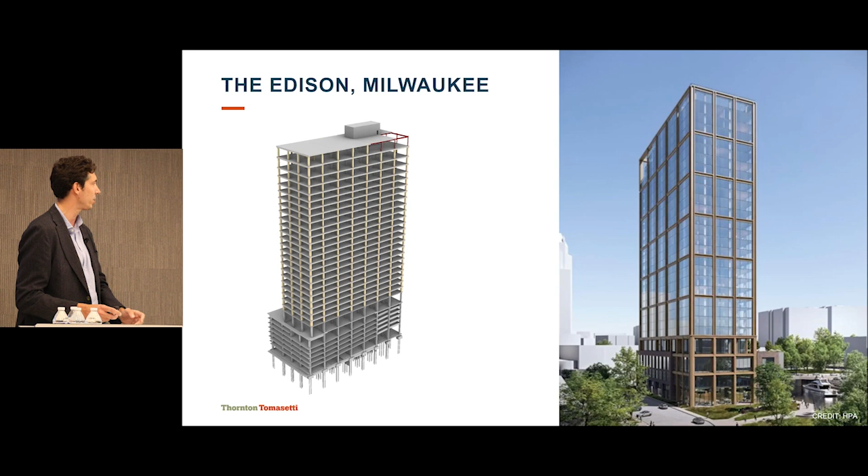But now they're going to a new height. Ascent was 25 stories; now we're rising all the way to 35 stories. And it's pushing the standards in different ways, including bringing Passive House certification to a high-rise building. So it's going to be a very unique building. It's not only breaking the height of mass timber construction, but also becoming a very sustainable building with its systems.

Because we were using the same contractor as in Ascent, we looked back and asked, what can we do better than what we did in Ascent? We realized that in a traditional timber system, you have the concrete topping that Benton and Eric were showing, then your CLT slab, and below that your glulam beams. That ends up being quite a big structural depth.

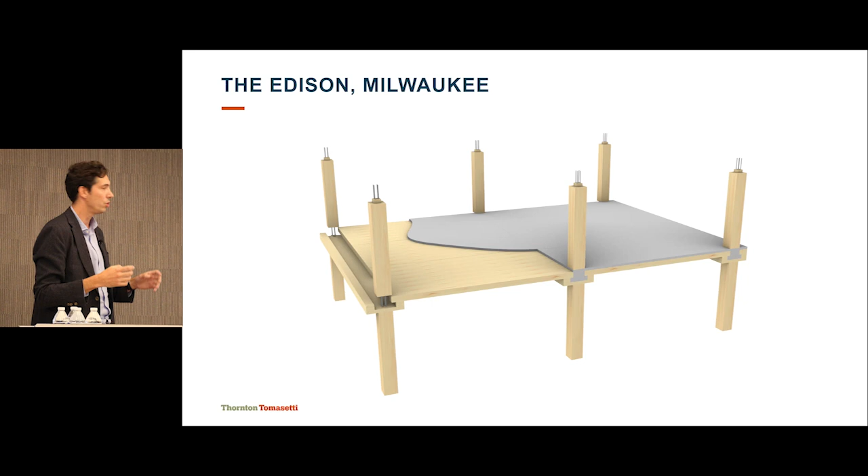The other item is that when you go to these heights, the connections between your beams and columns have to have a certain fire rating, typically 2 to 3 hours, so all those connections become expensive. A number of things pushed us to rethink our mass timber system. Instead of a timber system, we went to a hybrid system, where we have concrete beams supporting CLT slabs.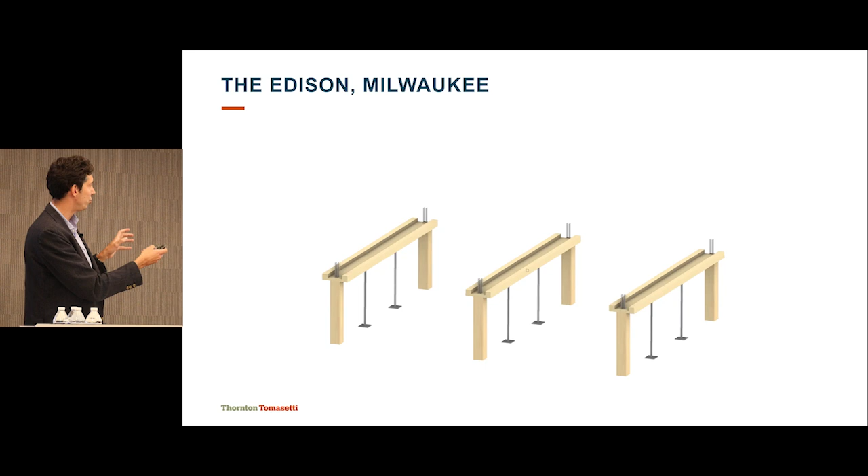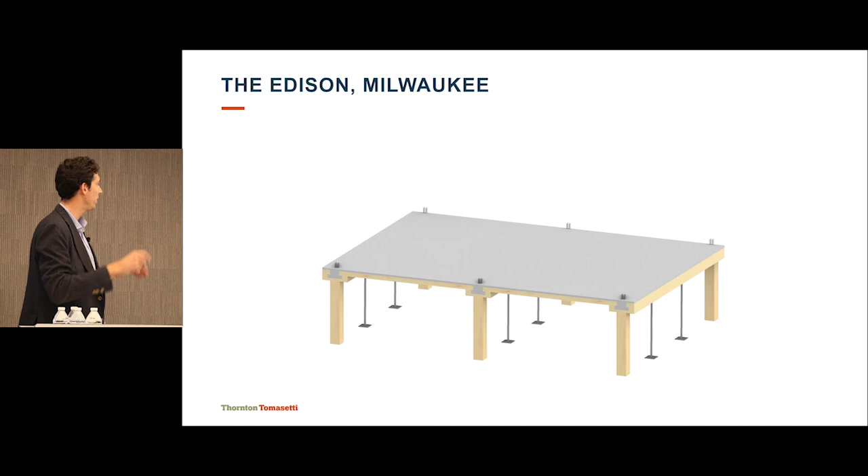I'll do a very quick construction sequence. We have the glulam columns that support these prefabricated C-shapes that are temporarily shored. On top of that we put our glulam or CLT panels, so you can have a continuous mass timber surface. Then on top of that we put a concrete topping that forms these concrete beams. So now we don't need any complicated connectors, and we can immediately build the next floor.

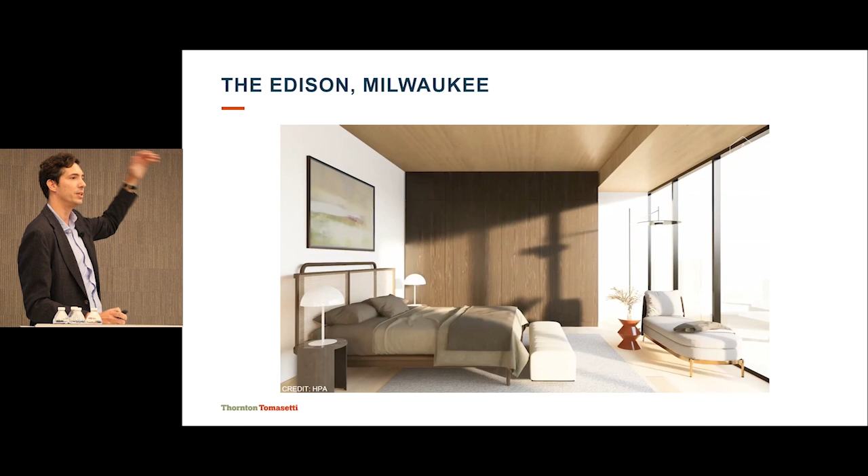This system has actually become very cost competitive, especially in markets where concrete is very competitive. The combination of both is opening a lot of possibilities. Now we can do long spans and higher loads like labs. We're seeing a lot of opportunities with this system while keeping the aesthetics of mass timber construction. You still have your ceilings, your beams, your glulam columns that preserve that aesthetic.

And this is the top floor, where we have these skylights and start bringing in this connection. To me, this starts talking about that connection of timber, right? How it connects you back to nature in the city space.

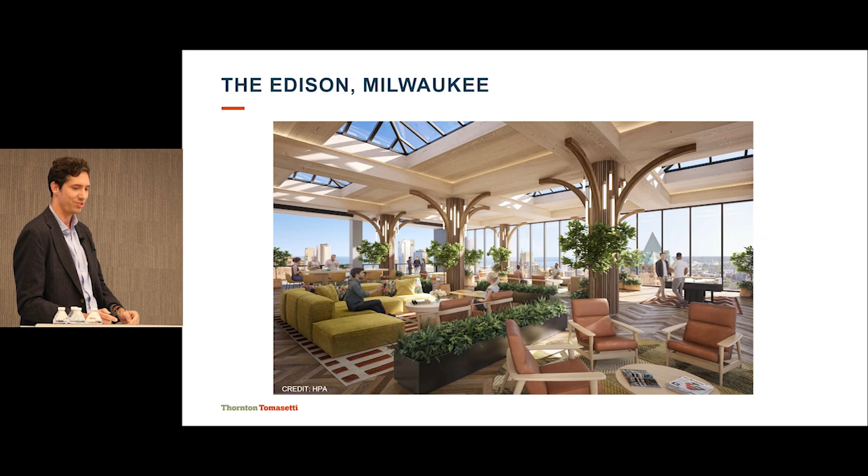For a few minutes, Daniel Safarik is going to summarize the research of these past 4 or 5 years that the Council on Tall Buildings and Urban Habitat has been involved with. Dan is the Director of Research and Thought Leadership at CTBUH, and he's co-authored numerous of the Council's technical guides, including this one, Tall Timber: Mass Timber and High-Rise Buildings. He's been the editor-in-chief from 2013 to the present, and also the director of the China office.

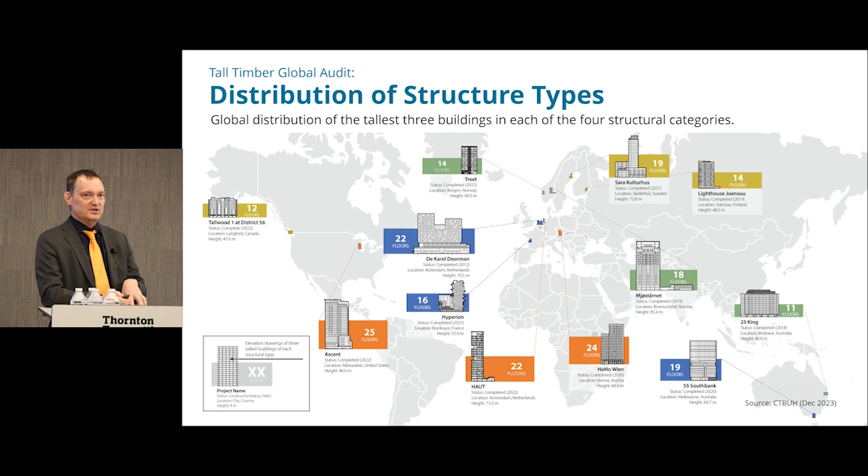We conducted a tall timber global audit, and effectively we set the limit at 8 stories and up. Typically, if you go below 8 stories, you're talking about other types of construction that are more commonplace and not strictly mass timber, but more like the frame construction we're used to seeing in suburban conditions. So we decided not to include those because there's billions of those.

But when we got into the tall timber, going from the mass timber qualification, you see that a lot of them are residential, a lot of them are in Europe, and a lot of them are all timber. That is starting to change, though. You start to see more hybrids coming in the taller we get. And there's a lot of good reasons for that, which we've already alluded to in some of these project examples.

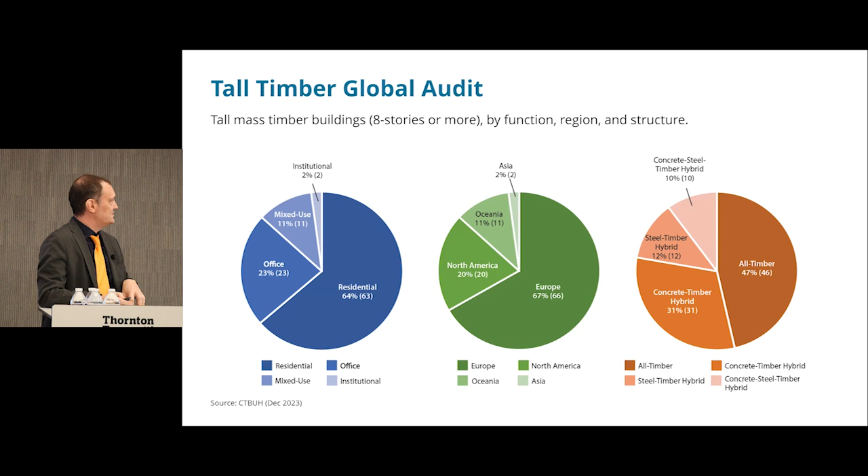We got funded by a research project with the U.S. Forest Service and the Binational Softwood Lumber Council to develop an awareness and educational program about tall timber. This involved a set of case studies, and also what I would call 10 to 12 advice columns from some of the leading experts in tall timber, considerations you should undertake if you are serious about developing a tall timber building. Some of those folks are also in the audience tonight.

This is the book. Carol already did me the favor of putting it up in the physical space, so I'll just show it on the screen. It is quite substantial, we're very proud of it, and it is available for sale on our website.

We also conducted a symposium as the timber hybrid question became more acute. This resulted in a great gathering, including some of the people who are in this room again tonight, at Crown Hall, not a timber building, but a very famous building by Mies van der Rohe at IIT in Chicago. That was about 2 years ago, and that was the kickoff for this project, which is the future potential of steel timber hybrid buildings specifically. We actually got the steel and the timber industries together to talk about this concept.

And there's some footnotes to that, but the long story short is that we are going to produce a really good report showing the best examples of case studies with the timber steel hybrid combination. So just to give you an idea of how we classify these structures, an all timber structure is one that's considered to be, well, basically all the major structural forces are handled by timber.

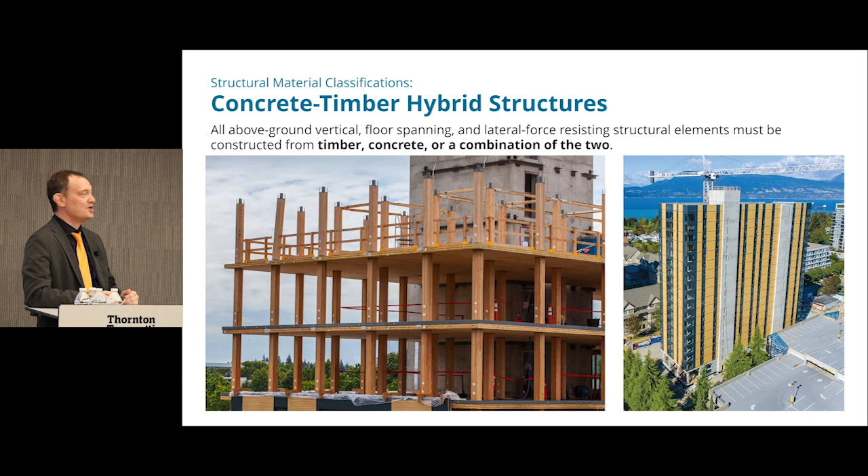Concrete timber hybrid structures are similar to the ones that you've been seeing in the previous projects, where basically all the above ground vertical floor spanning and the lateral force resisting structural elements are constructed in timber, concrete, or a combination of the two. And what we're increasingly finding is, again, the higher you go, the more you need a hybrid structure of some kind.

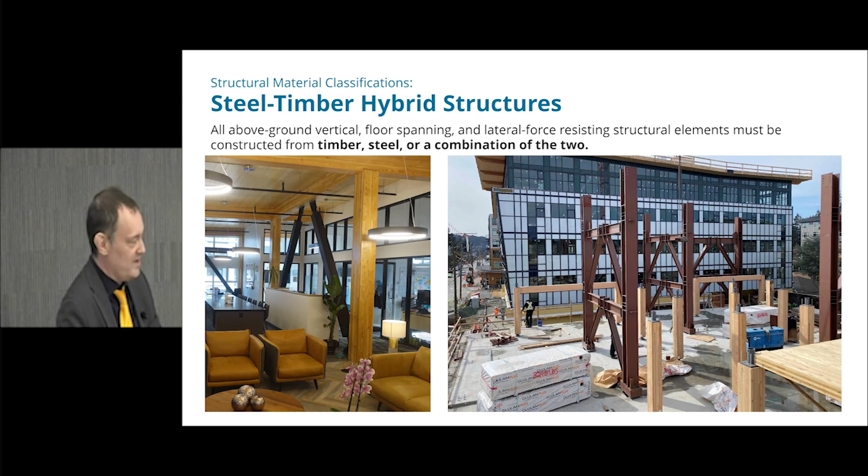And then, of course, you have the ultimate combination, which is the concrete steel timber hybrid structure. What we're looking at here is actually quite old. It's from 2003, and it was really a trailblazing project. It's called De Karel Doorman. It's an extension of a 2 or 3 story 1940s art moderne department store, which was much beloved in the community because it was one of the first buildings that was built after Rotterdam was pretty much leveled in World War II.

And the only way to build a proper extension on top of this was to use light gauge steel. And actually, I'm not even sure if we would call this mass timber today. It's kind of an LVL hybrid. They came up with this bespoke system that proved out that this can be done. And now there's a lot of more developed systems for doing this.

So the basic reason we would use hybrids kind of comes down to a couple of optimization factors. One is the greater spanning capability compared with an all timber system. Obviously, you can go long distances with timber, but the cost that exacts is that you then start to have deeper and deeper beams, which become impractical. You can have more efficient structural sizes for both the columns and the spanning elements. These are two approximately similar bearing capabilities, with a steel column and a timber column, and you can see how much bigger the all timber column actually is.

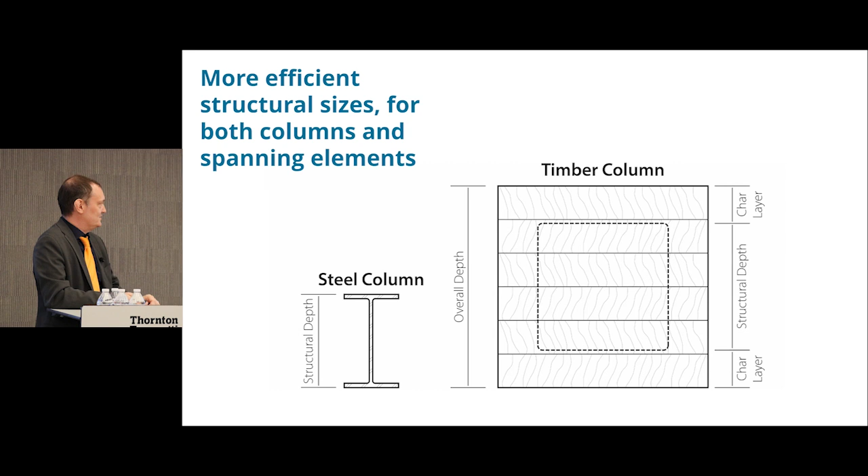You can obviously achieve greater heights with steel's greater compressive strength. This is an example of a building that really took that example of the floors being the main factor in the weight of the building and the amount of carbon that's invested. This was a hybrid tower that proposed going all the way up to 103 stories with a concrete steel timber hybrid system. The big operative difference there being that the floors were CLT.

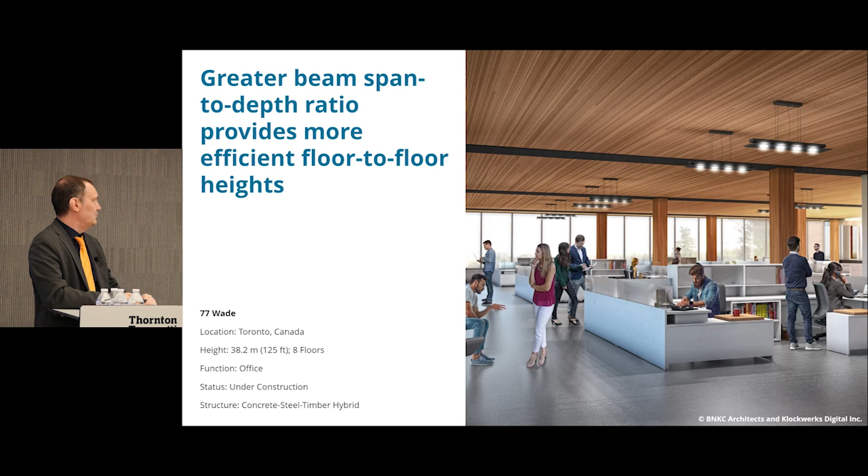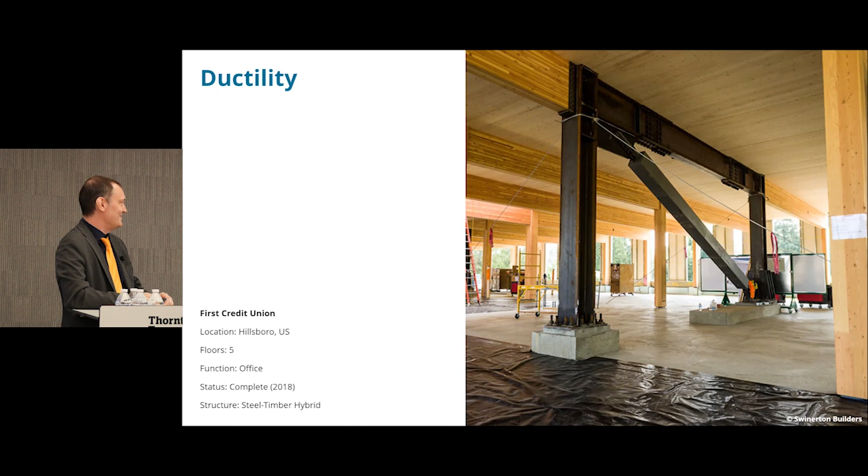But you still have the maximization of timber's biophilic properties. So you're not necessarily dependent on it for all the structural loads, but you are able to then display the structural timber that you do have in an aesthetically pleasing way. I happen to think that the intersection of timber and steel is a great thing to be looking at from an aesthetic standpoint, as well as a structural efficiency.

So as part of this project that we developed as the outcome of this grant, we did a Tall Timber website, which is updated consistently, unlike a big massive book that you can only put out every couple of years. The Tall Timber website is updated constantly. As soon as a building enters our database that is tagged timber, it goes on this website.